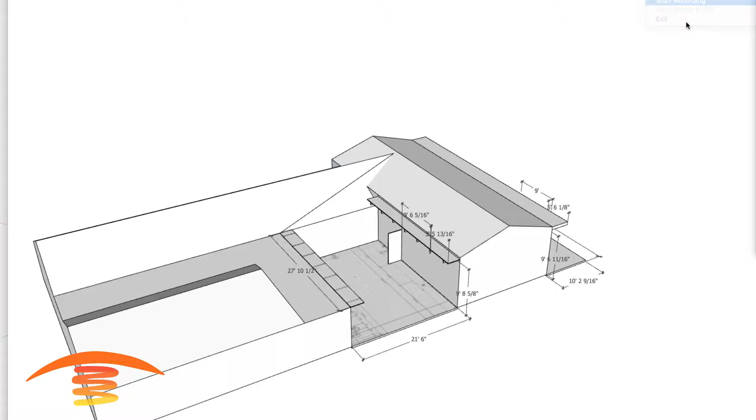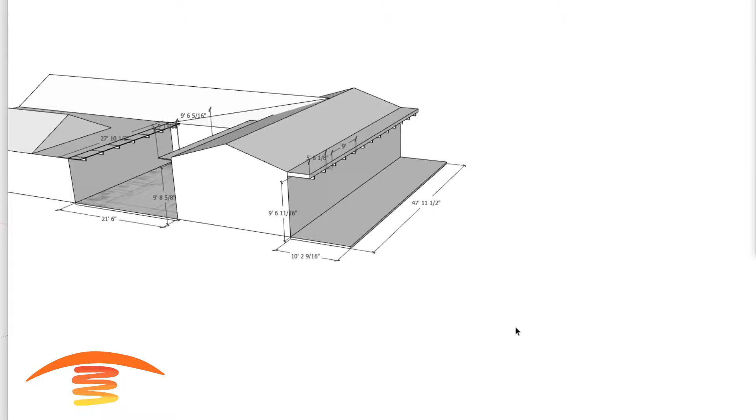Today we're going to look at a residence here. This is going to be a coastal residence. Here we have the back edge of the home, and this is going to be exposed to not only the ocean, but the bluff that goes downhill here. It's not right on the coast itself, but it's very close, so there's going to be a lot of exposure, especially wind exposure. We need to be concerned about that.

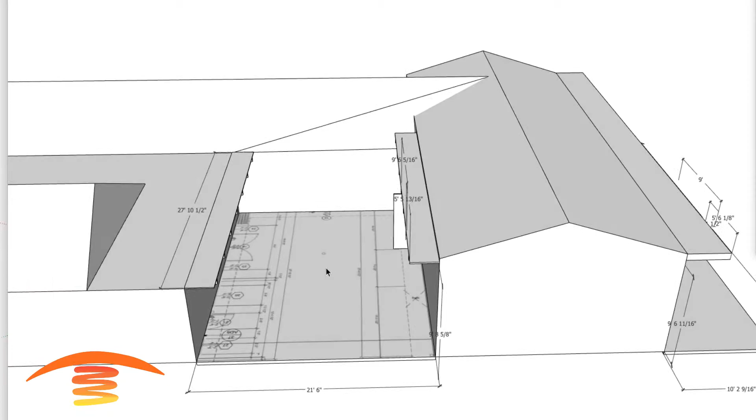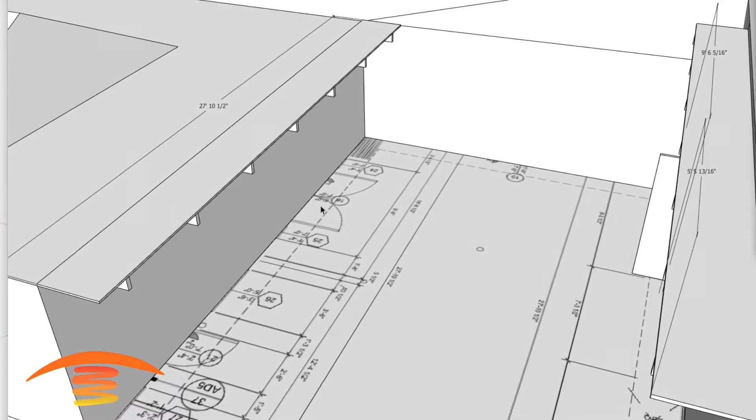In the second part of the application, we're going to look at a little courtyard area here. In the courtyard we have limitations with regards to accordion style doors that are going to be opening from here to here. I believe this whole section opens to over here, and then we have some doorways here, a small door here, and also some windows. So those are going to be some of the considerations for this space.

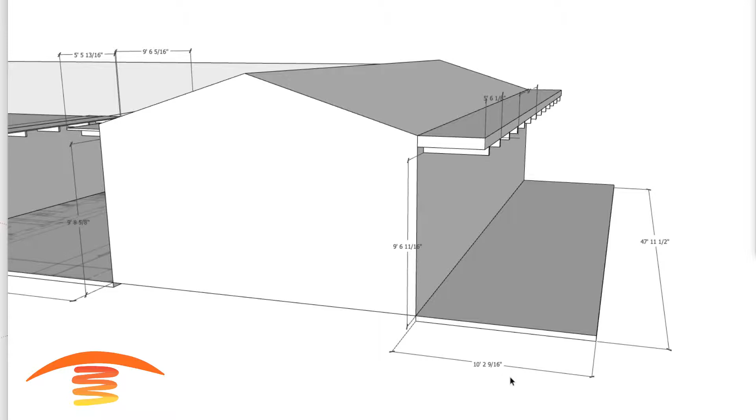Real quickly, we got 21.5 by 27, and down to the bottom of these rafters or joists here we have 9/8. And if we look at the back side of the home, we got a 47, nearly 48 feet by 10 feet 3, and 9'6" to the bottom of this edge here. We'll go through these dimensions here in a little bit. So let's just go ahead and turn that dimension off.

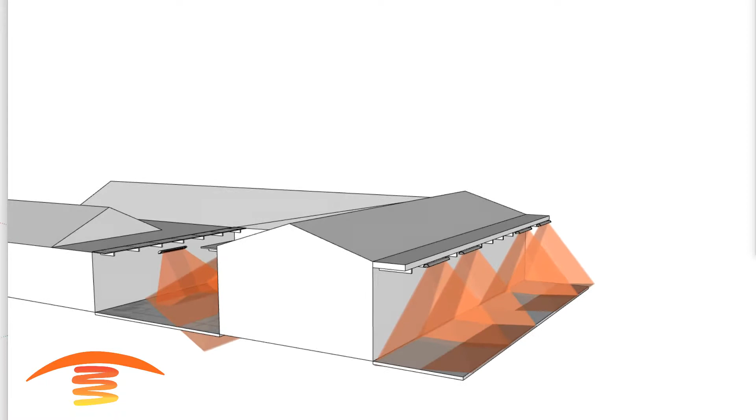As far as heaters, we're going to consider electric heaters. The back is pretty straightforward because there's going to be two separate areas here. We got the left area and a right area. I think this will be dining, and this will be reclining over here.

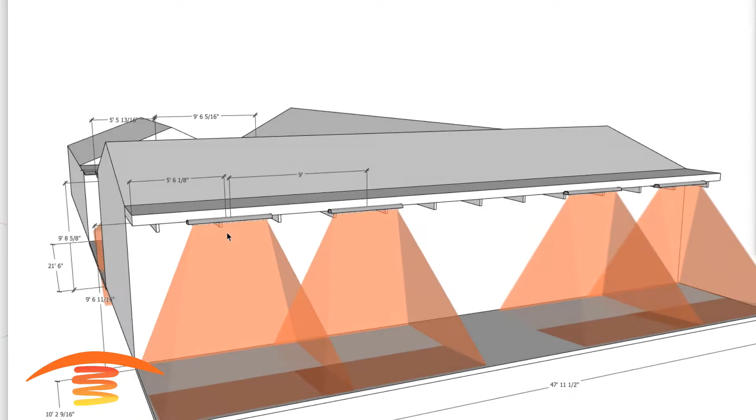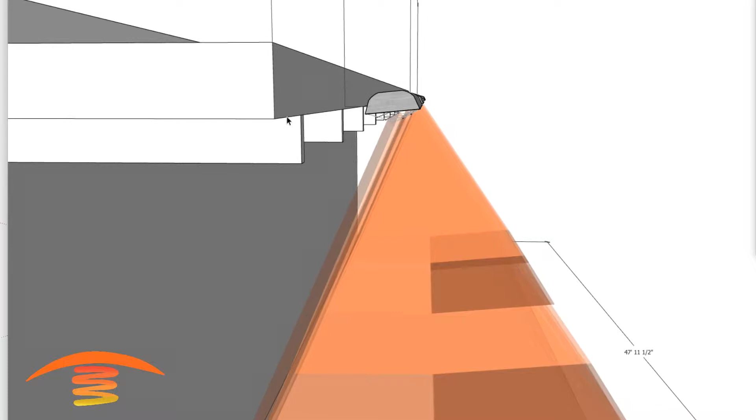Let's turn that dimension back on for a second. What I have here is the heater. These are WD 6024s, or 6,000 watt units, with two elements in them. It's a rather high application, and I have them sitting on the outside of the eave here, so there'll have to be a custom bracket built so that we can maintain 6 inches of clearance and keep the heater about level with the bottom of the eave here. The OEM bracket won't allow that 6-inch clearance, so there'll have to be a custom bracket made.

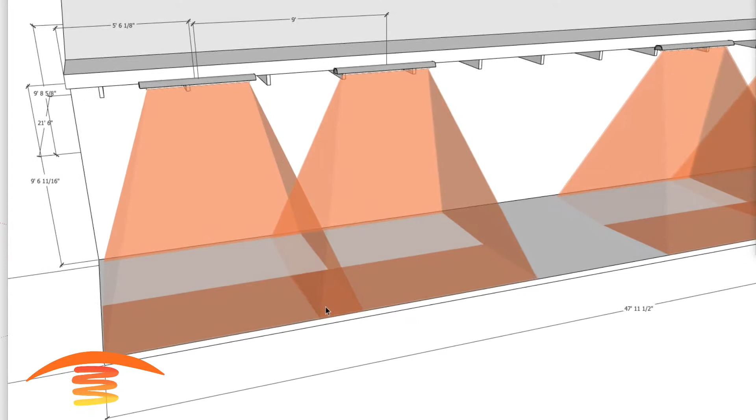It could be pretty simply made at a sheet metal shop using stainless steel. As you can see, I have 5 feet 6 inches to the center of the heater off the edge. That'll give us nice coverage on this edge. We got about a foot of overlapping here, 9 feet center from the other heater, and that would be true from this edge as well. So we'll have 5'6" to center here, and 9 foot to center on this one. That'll give us those two nice footprints of heat for the back edge of the home.

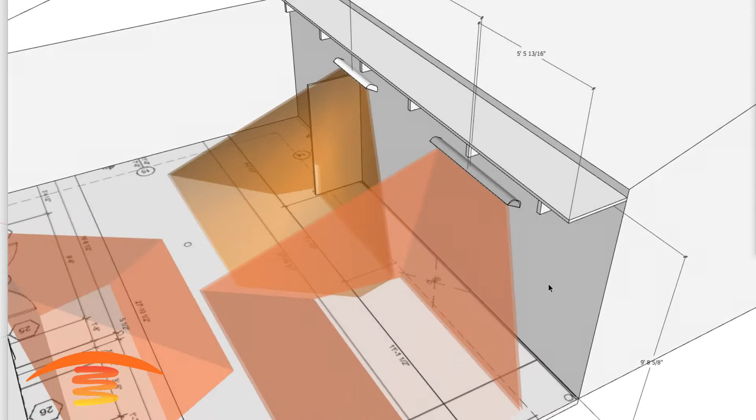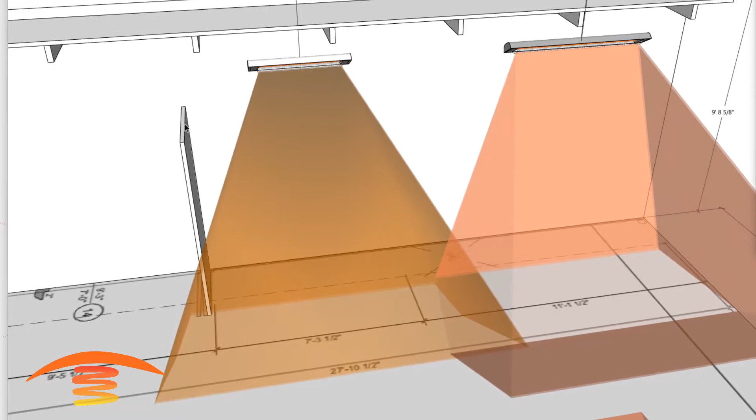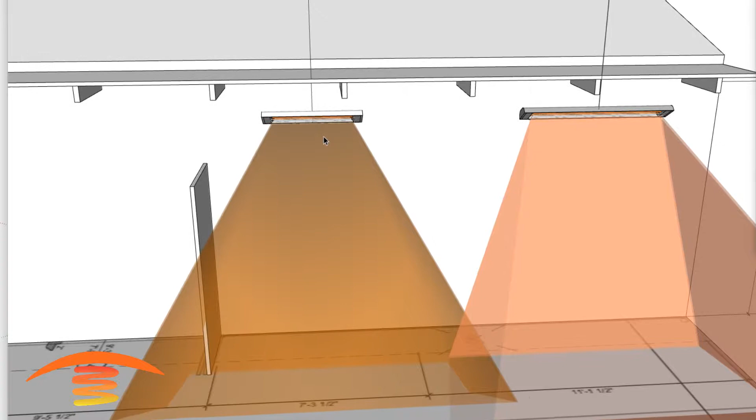Here I had to use two different style units because of this accordion door. I can't extend a heater up over the edge, or it will be closer than the allowed 48 inches of clearance from this edge to here. So I'm using a WD 5024, which is a dual element unit again, but it's a much shorter unit.

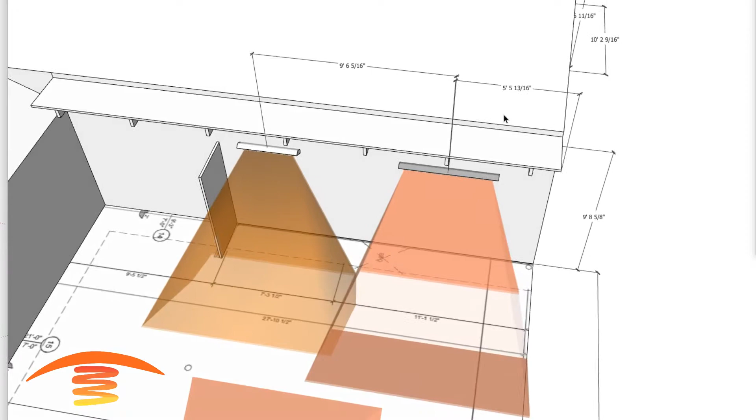You can see here I got them approximately 9.5 feet off center of each other. You got about a foot of overlap here, and here again that 5'6" from the edge to the center, which would give us a nice footprint over here. As you can see here, we're getting a pretty good coverage here.

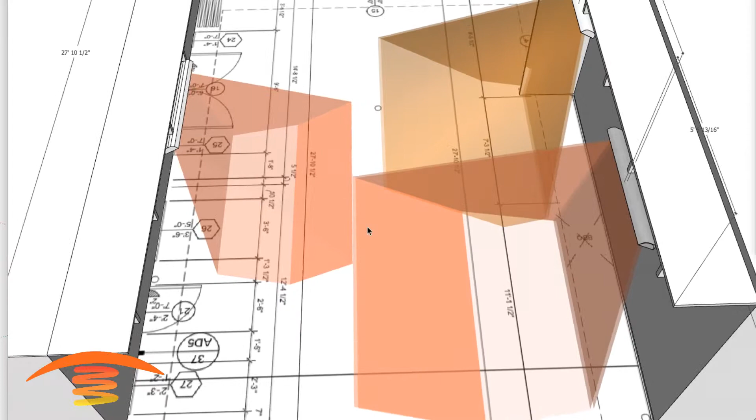You can see there's a lot of dead air space here, which is going to be not as acceptable, but there's going to be a section here in the patio where you get a little bit of overlapping, three-dimensional feel of the heat, and that would be pretty acceptable here. Obviously here we can cook and stuff and be warm enough, and you may have to reorganize your seating in order to accommodate the amount of heat you're looking for.

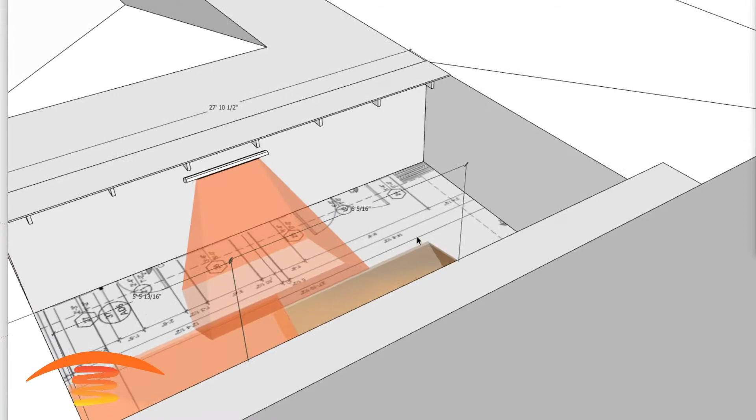On this edge here, I believe we have a window on this wall, and again the doorway is a limitation, and the doorway over here is a limitation, so we have to kind of go between the two edges of the door. I just have this heater centered right between the two doorways.

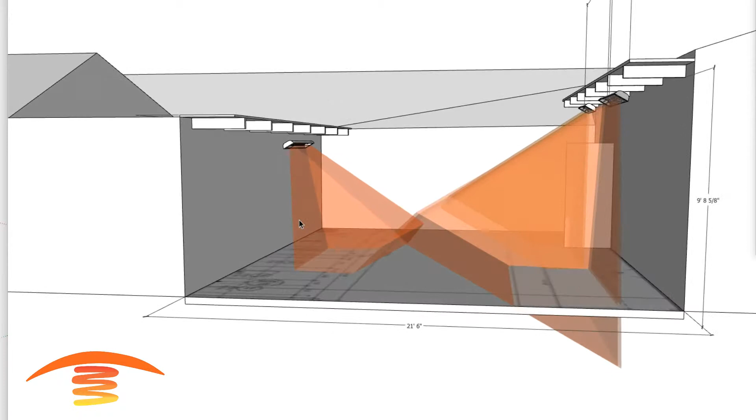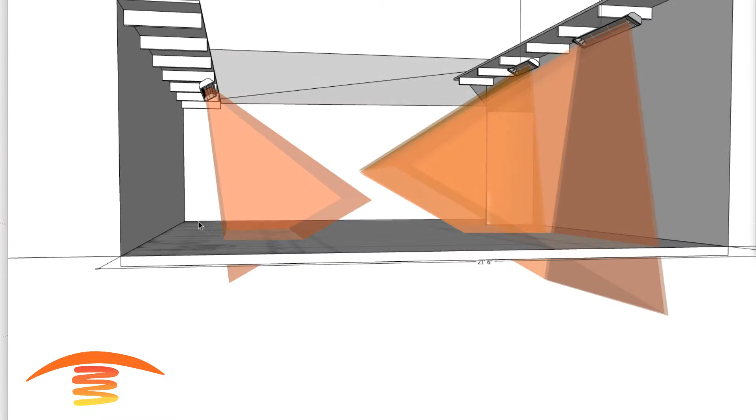Because this is a lower application, we could actually do just like what we're doing over here. We can put them on the eave, raise the heater up a little bit, so it's not as much of a view from a window over here. But this is a 4,000 watt unit, because of the height that we're dealing with over here.

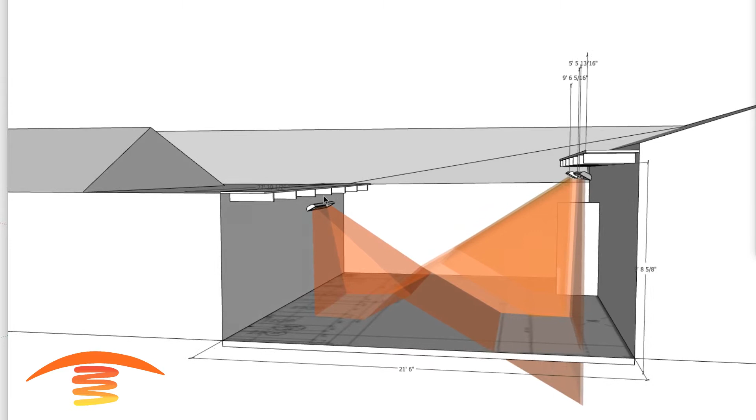Don't know that I have the height over here. Let's see if I can gather that real quickly. So yeah, we're at 8 foot, 8'2" on that edge there. That would bring the heater down pretty low, and it'd probably be best to put it on the eave if we can do that on this part of the structure. I'm not quite sure if these joists here are exposed like that, or whether it has an eave face to it.

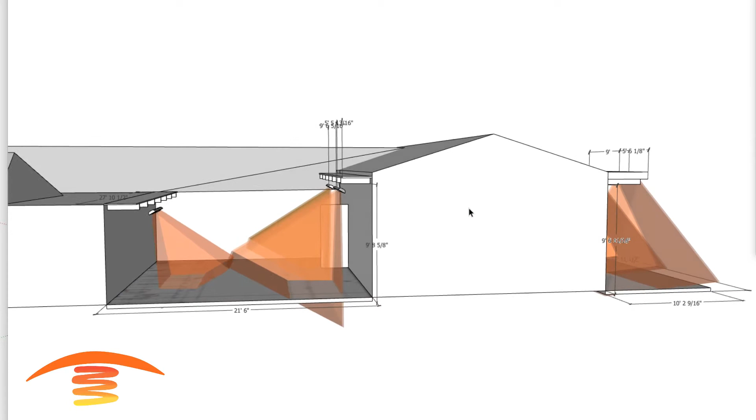So there you go. I think that's pretty much will describe what we have available for this application.